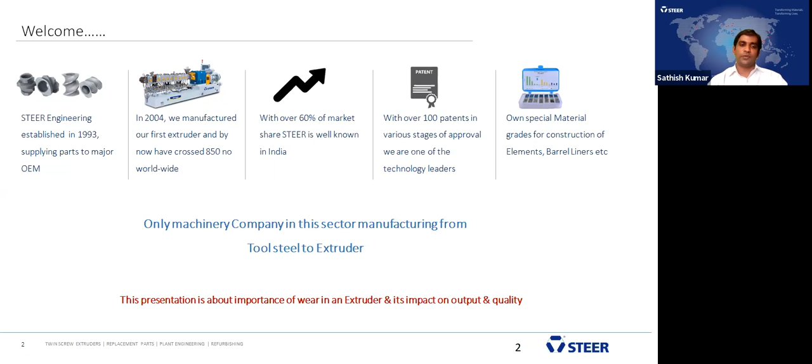One more major point I have to stress here is that we are the only machinery company in this sector with end-to-end solutions, from making tool steel to the extruder. The majority of our operations and products are in-house, so we have a lot of control over quality. In today's webinar, we will be focusing more on wear and its impacts.

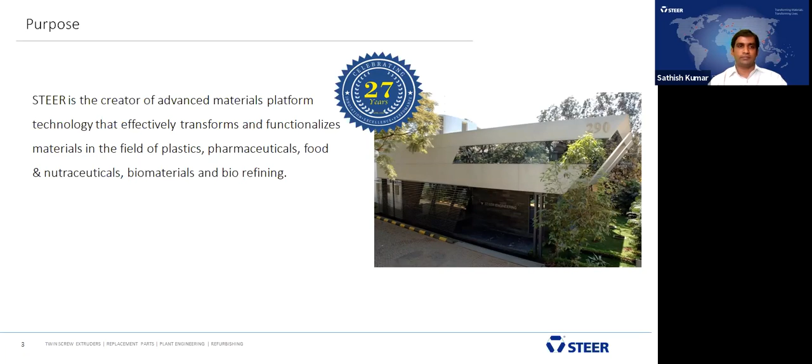Our purpose is to create technology that effectively transforms and functionalizes materials in plastics, pharma, food, nutraceuticals, biomaterials, and biorefining. We have completed 27 years since our inception. These are all our core people.

Dr. Babu Padmanabhan, our MD and Chief Knowledge Officer and founder of Steer Group, is a technocrat and a very well-known name in the compounding industry. He has contributed to 60 plus patents in design, manufacturing, and MOC, and he is the creator of disruptive continuous manufacturing technologies used in applications such as pharma, food, and so on.

Subodh Jindal is our global CEO. He has 14 plus years of experience handling businesses with P&L responsibility. He has handled businesses such as material science and life science, market models such as B2B and B2C, and franchisee businesses with different skills and complexities. He is a Six Sigma black belt holder with a strong process orientation towards any manufacturing technique.

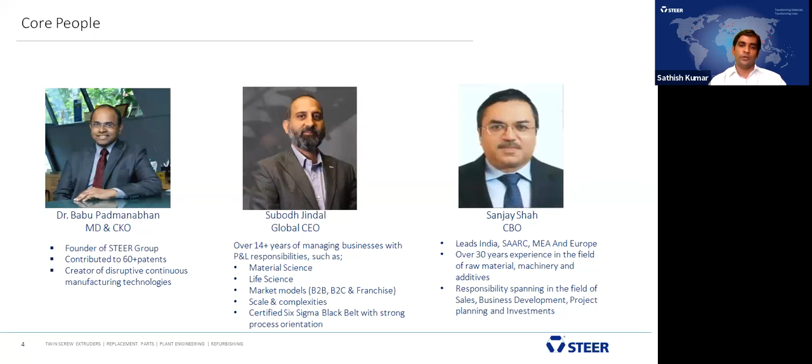Sanjay Shah is our Chief Business Officer, leading our India, SAARC, MEA, and Europe business. He has 30 plus years of experience in raw materials, as well as machinery and additives. He has handled many business development activities, sales, project planning, and investment during his tenure of the last 30 years.

Industries we serve: polymer is our major industry, where the majority of our revenue comes from, followed by pharmaceutical and food, and we also produce machines and spare parts for powder coat, bioplastic, and construction. Apart from making extruders for all these sectors, we make spare parts for other OEMs as well. Our idea is to transplant the knowledge we have gained over the years to different sectors such as pharma, food, polymers, and powder coat.

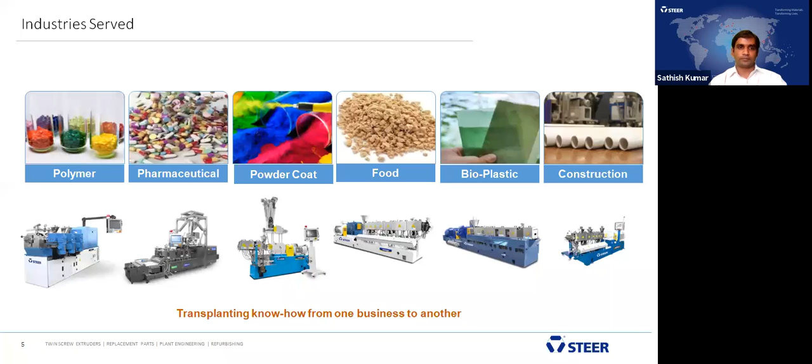We are a vertically integrated company where a lot of emphasis goes into making parts in-house. We do this with the help of our state-of-the-art manufacturing sites located in Coimbatore as well as in Bangalore. In Coimbatore, we have our own foundry to produce tool steel, and we also produce barrels, elements, and gearboxes in our Coimbatore facility. In Bangalore, being the head office, we have a manufacturing site to produce elements and shafts, and the main extruder is produced in Bangalore.

With the combination of these two facilities, we produce our own proprietary metallurgy that we call Acrolloy. We make element barrel shafts out of it. We make gearboxes, feeders, vacuum stuffers, panels. We have 3 different extruder platforms, Omega, Mega, and Alpha. We also have process centers to develop pharma and food grades. We also undertake plant engineering projects for plastic, pharma, and food business.

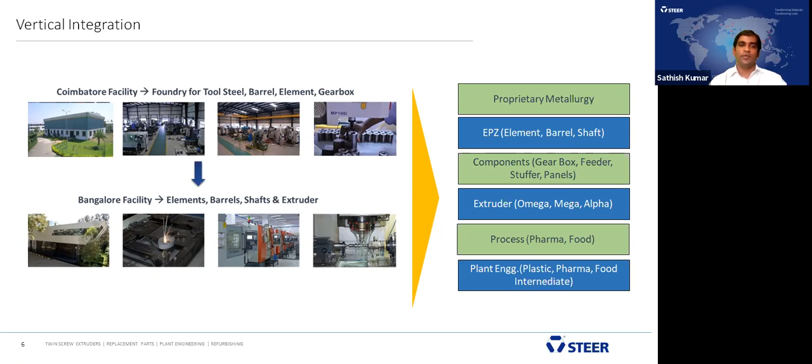Steer is an Indian company with global presence. We have our own offices in 4 different countries: Japan, US, China, and Bangalore, India being the head office. In all these global offices, we have our application development center where we have kept our R&D machines to cater to customer demands and their requirements.

We have 2 different manufacturing sites, one located in Coimbatore and another located in Bangalore. 10 satellite offices are there globally in various countries. We are a 500 plus employee company. As I told you before, we are a technology driven company with 100 plus patents at different levels of approval. 850 extruders we have already sold globally; apart from India, we have sold in almost 50 plus countries. We have sold almost 1 million elements globally.

One more major salient factor is we have a database of producing spare parts for other OEMs, in the quantity of almost 6,000 plus. It is global supply. Extruder processing zone snapshot: we hold a 20% market share in the EPZ spare part business, not only in India; we are global market leaders, one among the top 5 extruder spare parts producers in the whole world. As I mentioned, a 6,000 plus extruder database is available with us. So if a customer has a requirement of other OEM spare parts, they can give the requirement with the specification and we can produce, of course with validation and verification.

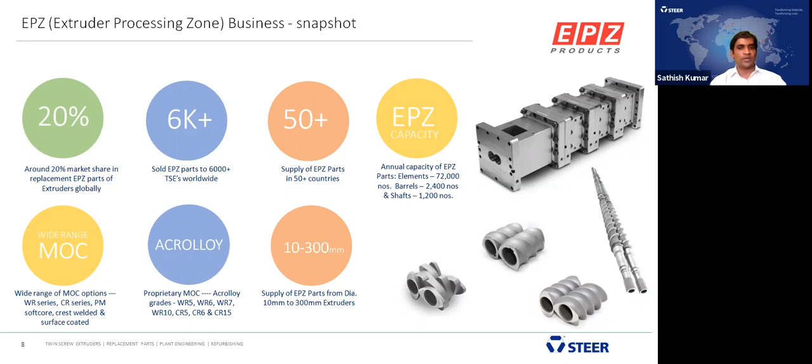Whatever new development or advanced materials we develop will be using these 4 different global application development centers, located in India, US, Japan, and China. Apart from providing new development and advanced material solutions, we do trials for customers before ordering any machine. If a customer wants to develop any new product or validate the existing material, they can come here and take a trial. After that, they can order the machine. We also provide testing, characterization, and validation support for our customers.

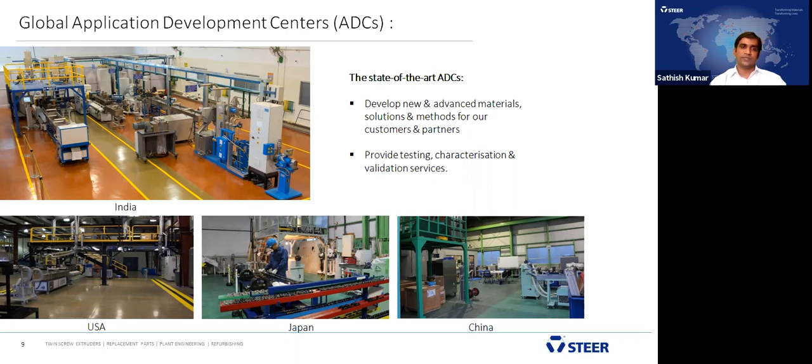Today we are going to discuss the wear pattern on twin screw extruders. When you do compounding, there are different polymers and fillers, and when you do the processing using a twin screw extruder, what is the effect of each zone? Because there is a screw to barrel clearance, how it affects and how the wear pattern changes, and that leads to the throughput, the final application, and also the mechanical properties. I'll just start with the introduction.

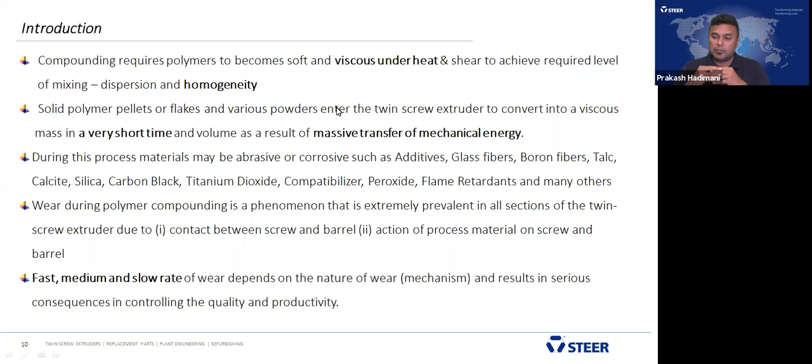When you talk about the wear during polymer compounding, the phenomena is extremely prevalent in all sections of the screws in the twin screw extruder, due to the contact between screw to screw and screw to barrel, and the action of the process of the material on the screws and the barrels.

When the process starts, the wear pattern becomes fast, medium, or slow rate. The wear pattern will not be uniform throughout the system. It will sometimes be faster, depending on the final application or on the material you use. If it's an abrasive material, the wear pattern will be faster. If you use mild or medium fillers, the wear pattern will be medium.

This mechanism results in serious consequences in controlling the quality and the productivity. Today we are going to discuss the impact of wear on output, productivity, and quality.

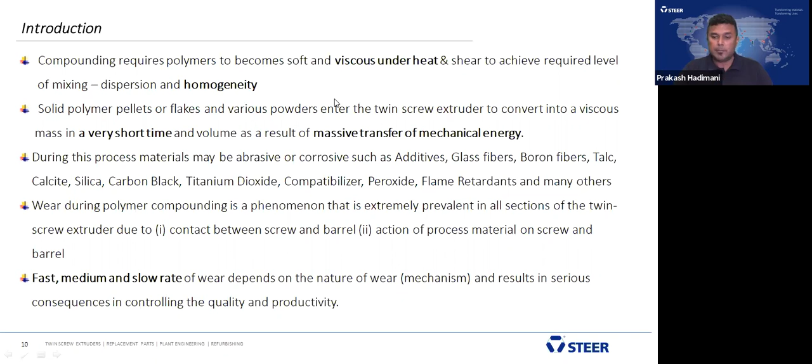We will just do the introduction. Once we finish the introduction, we start with the first zone. In the twin screw, there are many zones: the feeding zone, mixing and melting zone, and the side feeding zone where you feed material and mixing and melting also takes place. If you have another next zone, the second zone, you may add more filler, and that also has distributive and dispersive mixing, vacuum, and the metering section.

First, we'll discuss the feed zone. What is the phenomena that happens in the feed zone? In the feed zone, there are many types of polymers, which may be crystalline or amorphous in nature. Crystalline polymers include polyamide, nylon 6 and 6,6. Amorphous polymers include polycarbonate, and there are also recycled PET.

These materials result in abrasive wear due to the contact between screw and barrel. Feeding abrasive fillers such as titanium dioxide, calcium carbonate, and talc, if fed from the intake for the purpose of improving dispersion, causes abrasion of the surface due to particle flow.

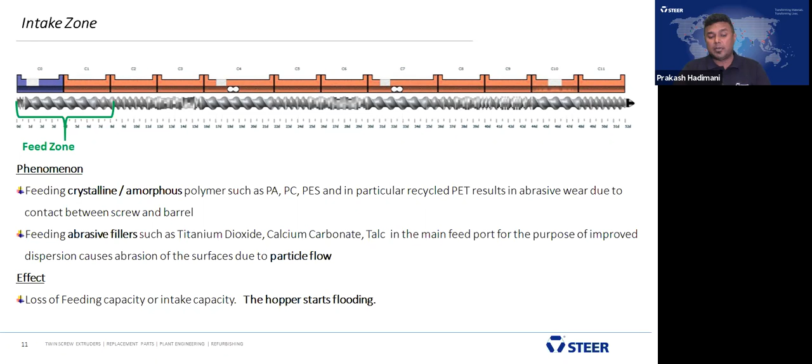We could move to the compression zone, which we call the melting zone. It includes the compression zone and melting zone - these two combine together, next to the melting zone.

What is the phenomena? When compression starts, the kneading block experiences a high level of mechanical flexing and starts rubbing against the barrel surface, causing abrasive wear or adhesive wear. This happens in the melting zone. The flow of abrasive particles with the melt during melting and mixing causes a high level of abrasive wear, because the particle flow contributes to melting and mixing, but also causes high level of abrasive wear to take place.

The presence of moisture is also a factor, because some hygroscopic materials like polyamide, and some fillers, are also hygroscopic in nature and absorb moisture. When moisture is present, free radicals cause corrosion - these are the materials that cause corrosion.

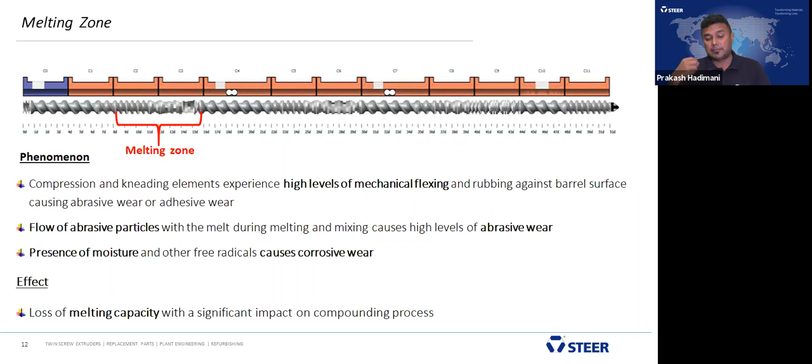What is the effect happening in the melting zone? The melting capacity drops because of wear and tear, and also because of corrosion and adhesive wear. This has a significant impact on the compounding process because melting capacity drops suddenly. That is the effect due to wear.

Now we move to the next section, the mixing and melting zone, because after the polymer is 100% molten, we try to feed talc from the side feeder, and then mixing and melting has to take place again in that particular section. So what is the phenomena that happens there?

Mixing and melting takes place, but the feeding of abrasive materials, some fillers from the side feeder, reduces the screw to barrel contact, and wear occurs due to the presence of abrasive materials.

What is the effect? Loss of dispersion, because wear and tear takes place. Due to that, there's loss of dispersion and loss of mechanical properties. The back venting starts flooding, which again blocks the system and reduces the final throughput.

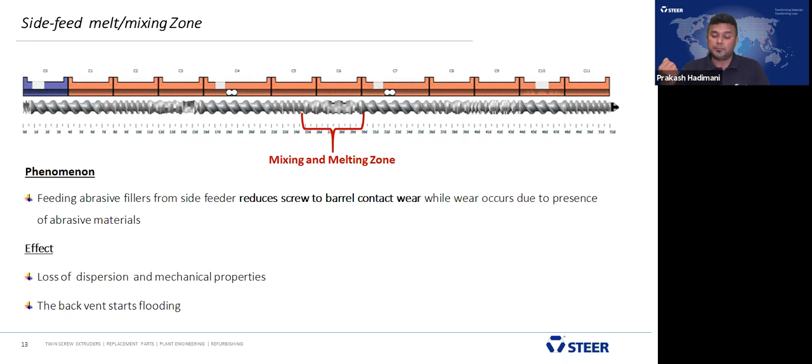Now, the important zone is the vacuum zone, because this phenomena contributes both to vacuum and also the metering zone. In this phenomena, the flexing of the screw in the metering section leads to abrasive wear in the end zone of the extruder, because material starts to stagnate there and it starts flexing the screw. That's in the metering zone.

It also forms corrosive wear due to the presence of monomer, moisture, and other volatile organic compounds. Corrosive nature comes in the vacuum because some of the unreacted monomer during polymerization, if you didn't apply and remove completely, then adhered unreacted monomer, moisture, and volatile organic compounds cause corrosion wear to take place during that section.

What effect happens? Porosity. For example, if the vacuum didn't work, if it stops functioning, what are the effects? Porosity in the final product, voids in the final product, which leads to reduced mechanical properties, lowering the mechanical property of the final compound, due to many reasons.

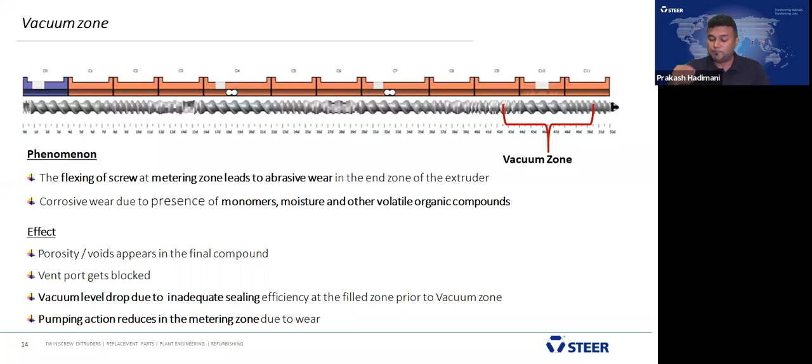Now I have given a small introduction about how the polymer behaves, the polymer phenomena in each section of the twin screw extruder. I have covered intake, melting mixing zone, side feeder zone, and then vacuum and metering section.

Now we are going to talk about case studies on the impact of wear on quality and output. First we discuss the quality, and later stage we will discuss the output.

In the impact of wear on quality, we have selected three zones. One selection was the compression and kneading section. The second zone we call kneading. The third zone, again, one more kneading section. In this DOE, we selected first kneading, second kneading, and third kneading.

In the first combination of this DOE: first kneading with no OD reduction, followed by second and third. When you put on the screw and process with no OD reduction as it is, for a 40 millimeter extruder at 1200 RPM, the screw diameter is 39.7. Per side, the screw to barrel clearance is 0.15. That is the actual setup. There, with no OD reduction, we started and demonstrated.

In the second trial, we reduced the OD in the first section by 0.6 millimeter on both sides, per side 0.3 millimeter, while the second and third sections had no OD reduction. At the third level, 1 millimeter on both sides, per side 0.5 millimeter each side, screw to barrel clearance OD reduction, while second and third zones had no OD reduction.

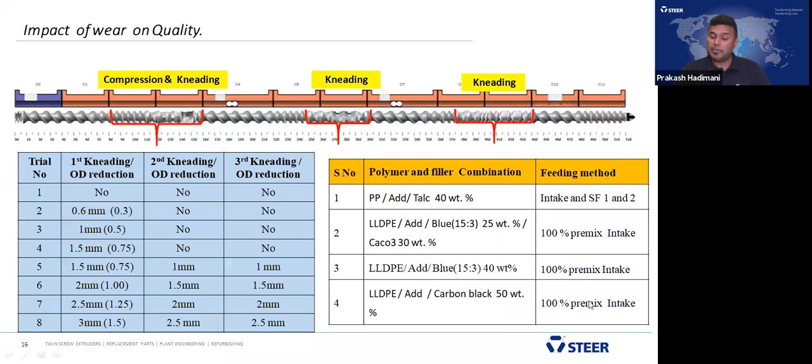We used two setups. One is the split feed method for polypropylene talc: polypropylene from the intake at 30%, and the remaining 10% from both side feeder 1 and side feeder 2. The other uses 100% premix, color masterbatch, and a combination of carbon black and calcium carbonate fed from the intake. These were the two setups used for this study.

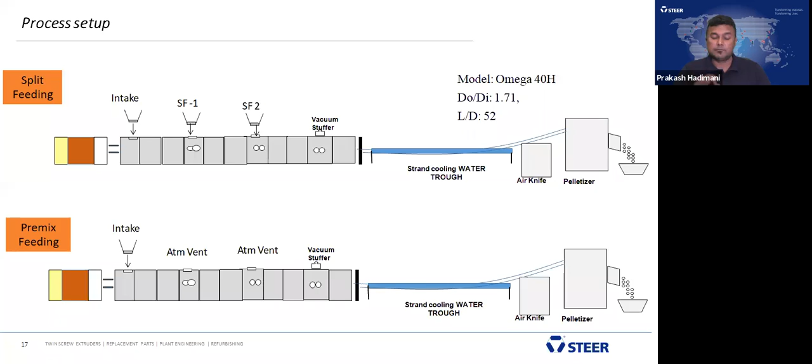First we'll talk about PP talc, 40% weight pigment, using no OD reduction with the split feed method. We observe the tensile strength mechanical property. Without OD reduction, we are getting 24.25 megapascal in tensile strength.

In the first kneading section, we reduce 0.3 millimeter per side; at that reduction, no difference in tensile strength. In the second section, again in the first kneading, we reduce 0.5 millimeter per side, both sides 1 millimeter total, still no difference. We didn't find any change in the mechanical property.

Up to the first section of kneading at 1.5, there's a slight reduction, but it's negligible because the polymer shows this. It's very important that when you feed polypropylene or any polymer, it has to be 100% molten, forming a homogeneous dispersion, so that when you feed the talc from the first side feeder, it has to wet and disperse completely. If there is no wear and tear, the mechanical property is maintained — that's the sign we're getting.

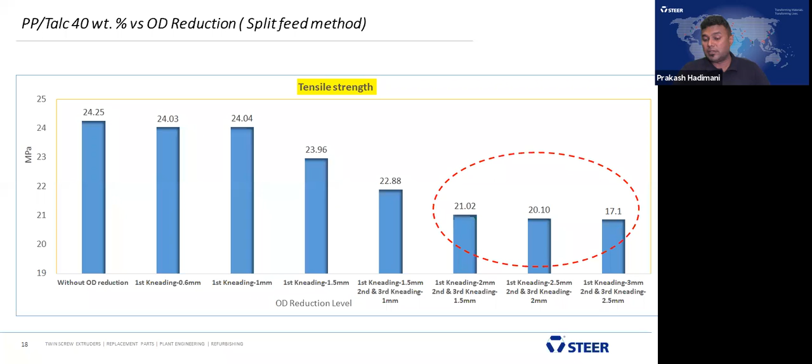In the larger section, first kneading at 2 millimeter and second and third kneading at 1.5 millimeter, there's a slightly reduced tensile strength. That indicates dispersion is being hampered — the dispersion isn't up to the mark because the polymer isn't melting properly, and the particles aren't dispersing completely through shear, since that isn't effective. That's why we get the reduction in tensile strength.

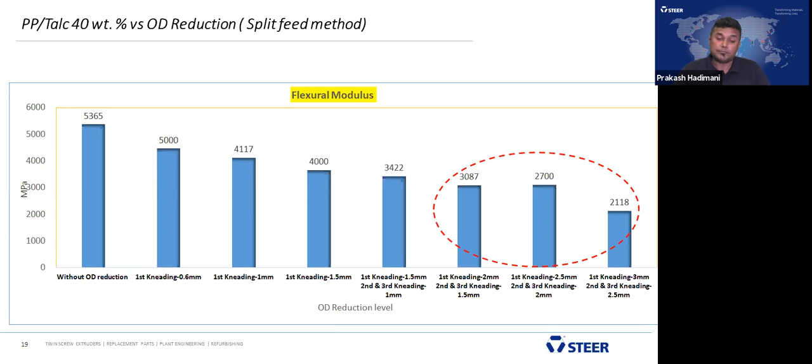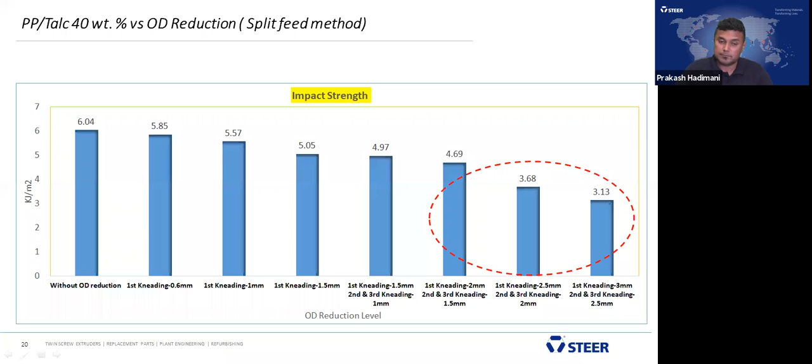In the case of first kneading at 3 millimeter meaning 1.5 per side, and the second and third kneading at 2.5 millimeter on both sides.

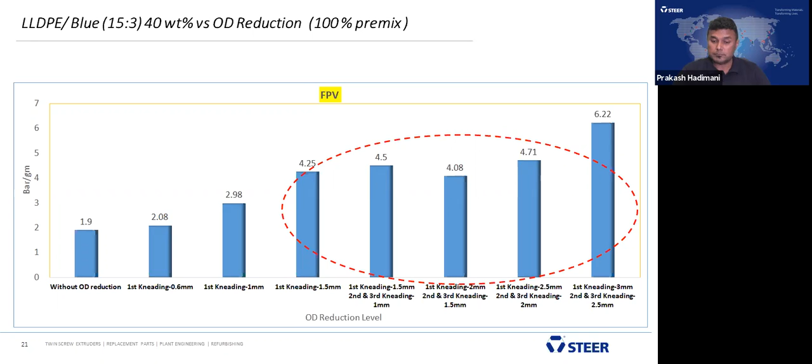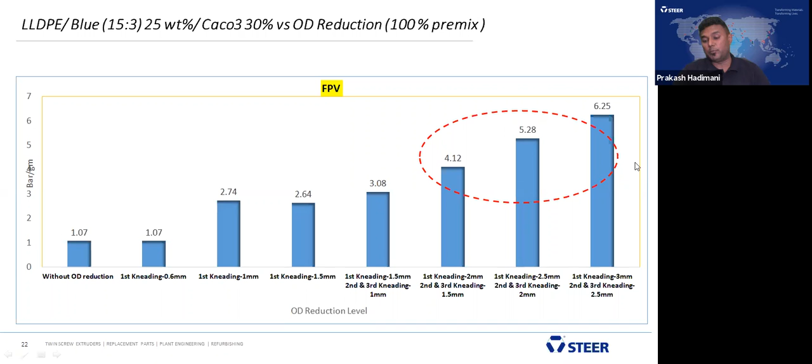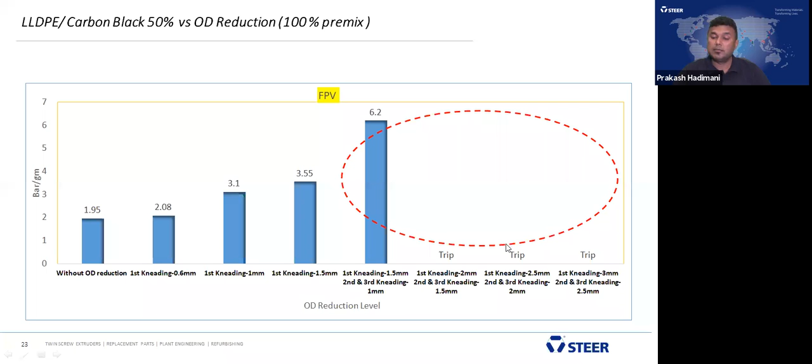And afterwards, in the case of first kneading 2 millimeter and 2.5, 3 millimeter, the filter pressure value was tripping because its dispersion quality was very poor. That gives an indication.

Thank you, Prakash. Here is our first poll question. Please select your answer from the list of options displayed on your screen. Considering the impact of wear on output and quality, as well as cost of elements, would you like to discuss with us and identify the best time for elements replacement? You have about 30 seconds to answer this question.

All right, 3, 2, and 1. Let's see the results. 84% say yes, and 0% say no. 16% say maybe later.

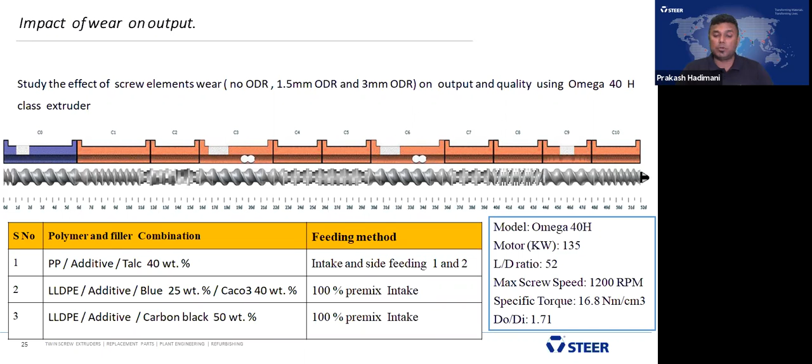If you see, first the split feed method, polypropylene fed from the intake and talc from the side feeder. With no OD reduction, we observed the throughput for the 40% talc: 200 kg per hour at 600 RPM, 300 kg per hour at 800 RPM. It's a 40 millimeter extruder.

And after doing 1.5 millimeter OD reduction, there is a slight drop in the throughput, 170 kg per hour, and at 800 RPM, 250 kg per hour. In the third case, 3 millimeter OD reduction, meaning 1.5 millimeter per side, we are getting 120 kg per hour at 600 RPM and 170 kg per hour at 800 RPM.

That shows if your polymer is not 100% melted and mixed, there is a reduction in the throughput. With 1.5 millimeter OD reduction at 600 RPM, 0.75 per side, there is a 15% drop in output. At 600 RPM with 3 millimeter OD reduction, meaning 1.5 millimeter per side, a 40% drop in output. At 800 RPM, similarly, with 1.5 millimeter, a 16% drop, okay? And at 800 RPM, 3 millimeter OD reduction, a 43% drop in output.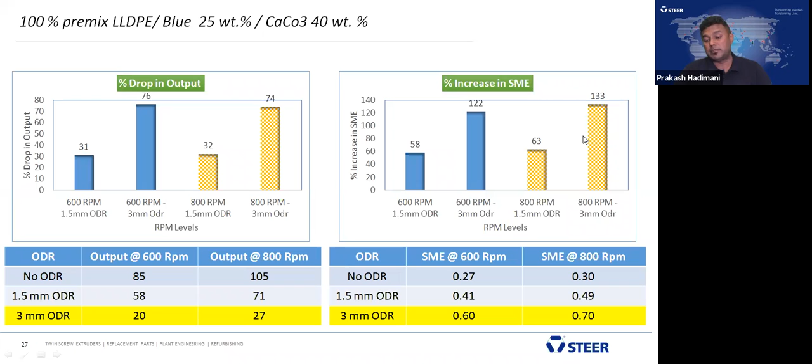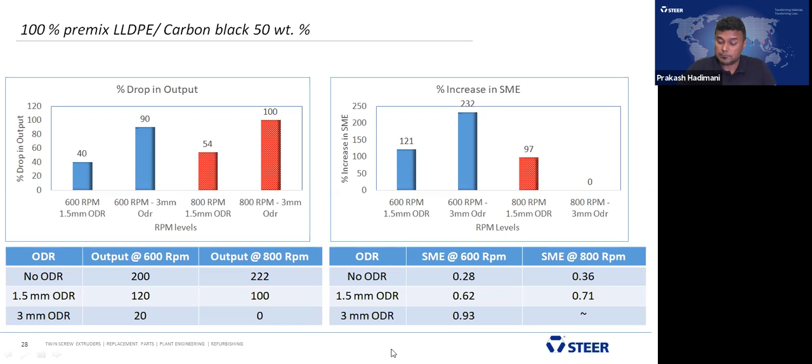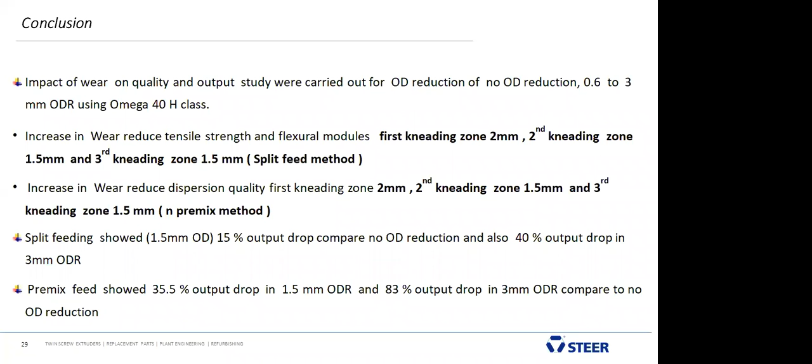Now, finally, we conclude: the study of the impact of wear on quality and output was carried out with OD reduction and also no OD reduction. We started from 0.6 millimeter on both sides, 0.3 per side, up to 3 millimeter OD reduction. We also studied different zones, and for 100% premix, OD reduction from the intake to the end, using the Omega 40 H class. Increased wear reduces tensile strength and flexural modulus.

In the split feed method, first kneading zone of 2 millimeter, second zone of 1.5 millimeter and third kneading zone of 1.5 millimeter. Increased wear reduces dispersion quality. In the premix method, the first kneading zone at 2 millimeter is acceptable, and the second kneading zone at 1.5 millimeter and third kneading zone at 1.5 millimeter. This is what we discussed on the quality.

When it comes to the output, the split feed method with 1.5 millimeter OD reduction showed a 15% output drop, and a 40% output drop with 3 millimeter OD reduction. The premix feed showed a 35.5% output drop at 1.5 millimeter, 0.75 millimeter per side, and an 83% output drop at 3 millimeter OD, 1.5 millimeter per side, compared to no OD reduction.

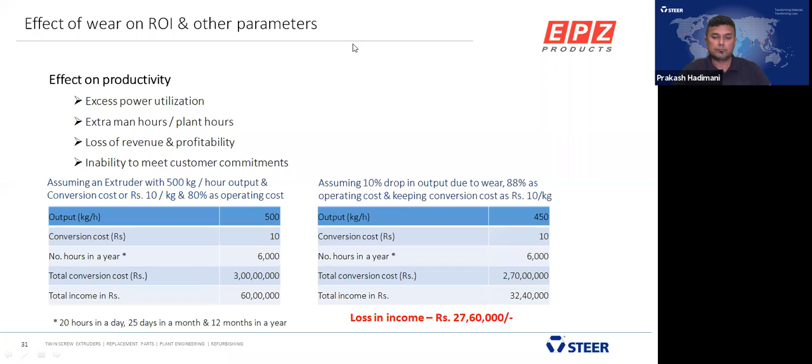Seems like some technical issue. Output as well as quality. Okay, thank you. Sorry for the interruption.

Thank you, Prakash, for your insights on effect of wear on quality and output. At the end, I would like to cover effect of wear on return on investment and other parameters. First, we will discuss the effect on productivity. What productivity effect does wear have in the extruder? First, to start with, excess power consumption: specific mechanical energy input is more if you have more wear in the extruder. So you need more power to produce the material, and again, extra cost for you.

You need extra manpower because with wear, output will be reduced. Because of output reduction, you need more man hours and plant hours to produce the required quantity. And because of less output and productivity, you will lose revenue and profitability in your business. Also you cannot meet your customer commitments in time because you need more time to produce the product. So I would like to explain with a simple calculation the productivity effect wear is causing.

Let us assume a 500 kg extruder, with output of 500 kg. Conversion cost from raw material to finished product is, let us assume, 10 rupees per kg, and of that 80% will be your operating cost. It's an assumption we are making. So output is 500 kg and conversion cost is 10 rupees. 6,000 hours in a year: I have considered 20 hours a day, 25 days a month, and 12 months.

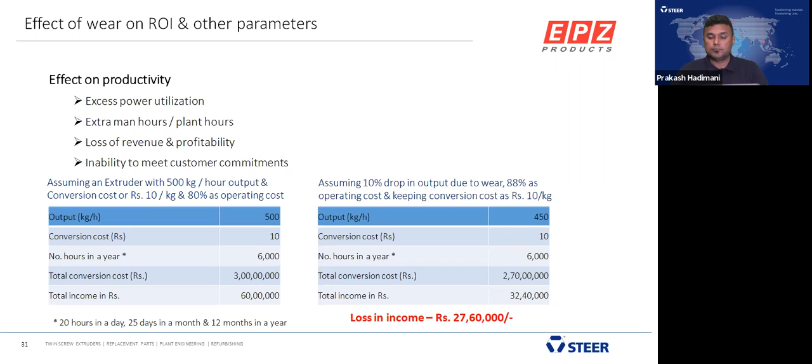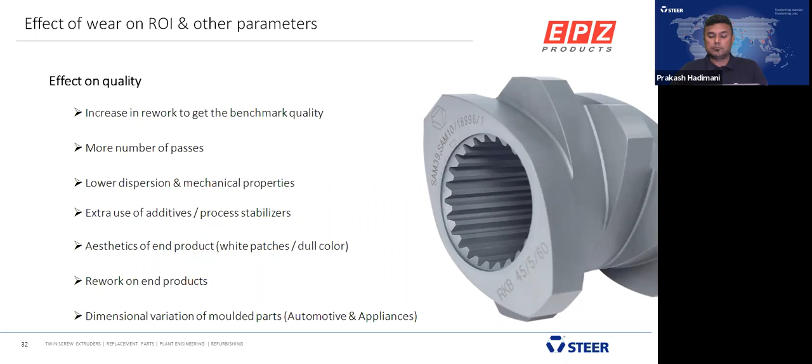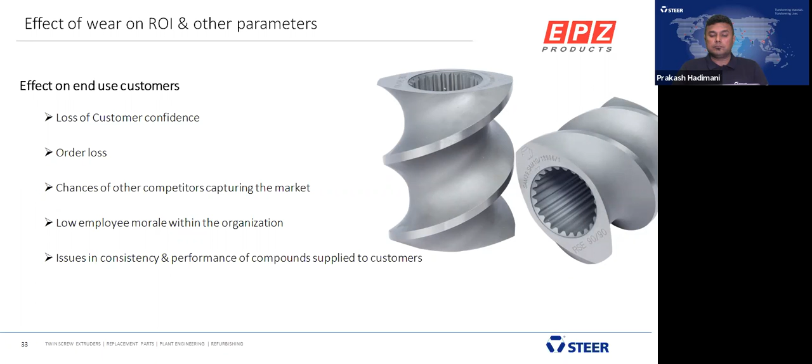Okay, finally, why do you need to go with Steer? What are our strengths and competitive advantages that our customers get? To name a few, you will get a wide range of MOC options for your applications, such as wear resistant grades, corrosion resistant grades, based on your application requirements. Powder metallurgy, of late we have developed this. If you have a high specific torque machine with high speed and output, we will give materials with the powder metallurgy technique having soft core.

And we can do crest welding elements also for different applications. We can do surface coating such as nitriding, titanium aluminum nitride, TiN coating. So many coatings are available based on your application requirements. A proprietary MOC, we have our own grade called Acrolite, as I told you. We have developed this internally, and it is performing very well in wear resistant applications as well as in corrosion resistant applications. These Acrolite MOCs are outperforming even powder metallurgy and any given grade available in the market globally.

And you will get a lot of range. So if your extruder is from 10 millimeter to 300 millimeter, in this range we can produce elements, barrels, shafts, dies, couplers, adapters, plugs, so many other parts. So we have the range. So whatever may be the size, you will get the solution from Steer.

And another advantage from Steer is that we have almost 6,000 plus extruder database. If you have a machine from Europe or US, Japan, you just have to tell the name of the machine with whatever specification is there in the machine. Based on that, we can develop and supply the elements, barrels, shafts to you. Of course, before supplying, we will validate and verify the dimensions and other things.

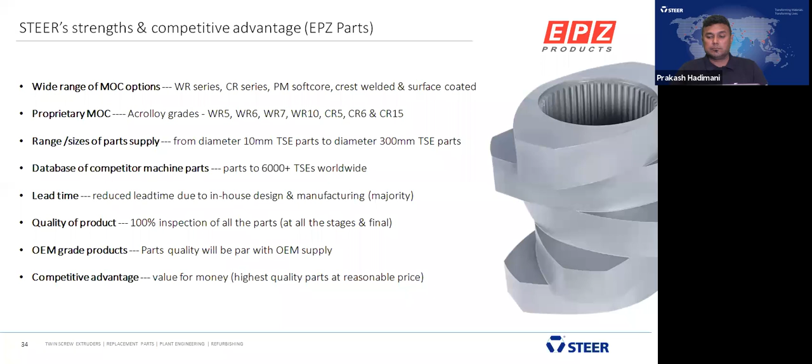And OEM grade product means if you have a machine from Europe or US or Japan, whatever product you are getting from OEMs, you will get similar products in terms of dimension as well as in quality and MOC. This is one more biggest advantage we provide to you. Finally, what I can summarize is that you will get value for money from our side, highest quality product with a reasonable amount of money. These are all the advantages you get.

We'll go to poll 3 now. Let's see what we have on the third poll question. Please select your answers from the list of options displayed on your screen. Would you be interested to work with us to understand the impact of wear on ROI for your particular application? You have about 30 seconds. All right, 3, 2, and 1. Let's see the results. 78% say yes and 22% say maybe later.

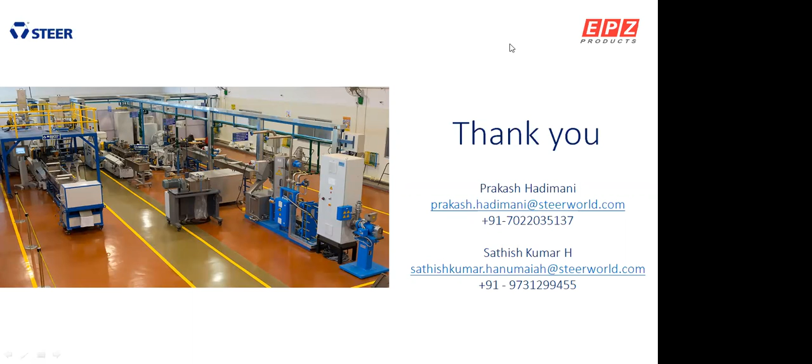Let's now move on to the Q&A session. Since we have a time constraint, we'll be taking fewer questions. We already exceeded the amount of time we had for this session. So the rest of the questions will be answered offline. So let's see what the first question is.